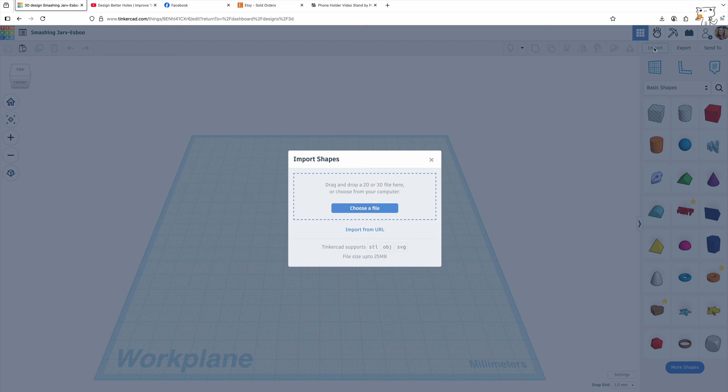Guys, today I'm going to show you how to import something into Tinkercad. Okay, you go to import, choose file, let's find something, let's say this cheer pom, click on art. I already have this size down to the size of a keychain, so when it imports, here it is.

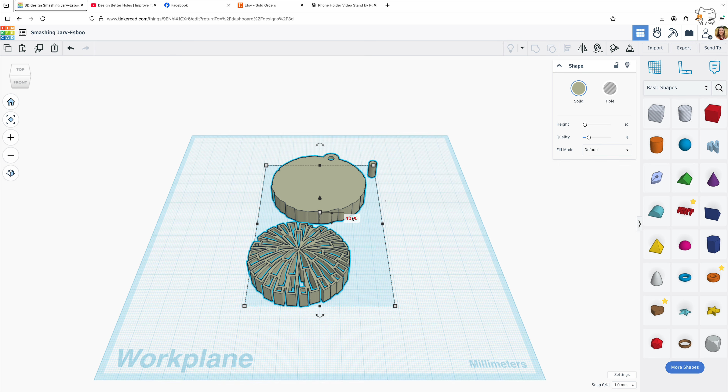So the first thing you want to do is click this middle, which shows you how tall something is. I'm going to reduce it down to 3 millimeters. Then I'm going to come up here, push duplicate, and move it over. Alright, so now you use this little square cube to move your things around. This is a block that creates a hole.

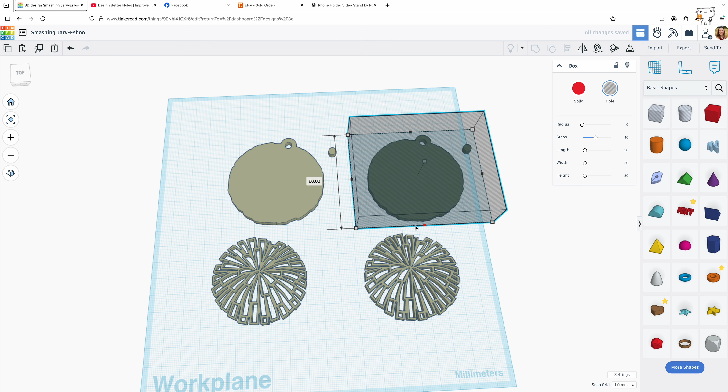So I'm going to go over what I need to cut out to separate these two things. So I want to keep this, so I'm going to get rid of this. Select, group. Red means it's doing what it needs to do. Okay, I want to get rid of this now. So select and group. And now this is the keychain hole.

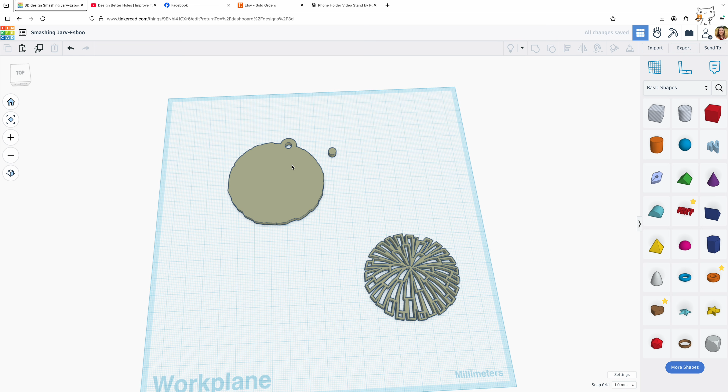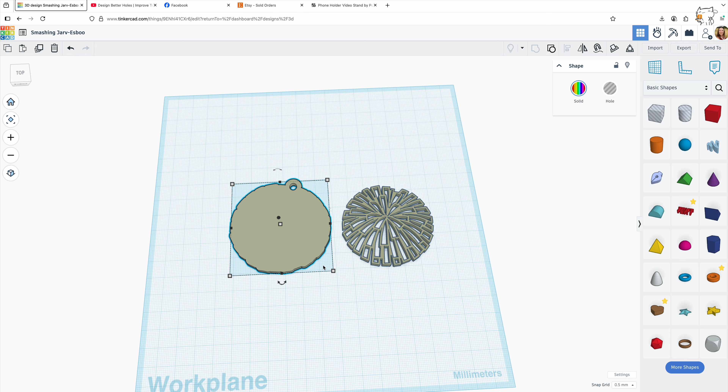I want to get rid of that also, so let's just put that on there, select and group. There we go. So now we have our two pieces. They're both at 3 millimeters high. So down here you can control your snap grid. So I want it to snap at 0.5 millimeters. What I'm going to do is I'm going to click on here and raise it up to 2.5.

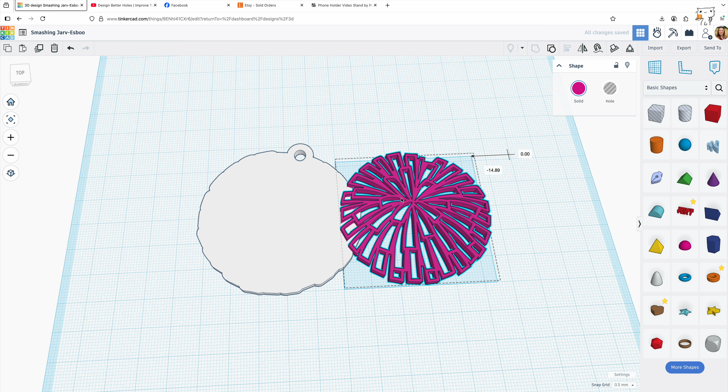Okay, so there we have that. I can change the color right here. I like to use the presets. Change the color of this. Alright, so then we have our two objects. We're going to center them by clicking these little dots to center them, and that doesn't work great because of the keychain hole. So I am going to drag this into place, and that looks pretty good to me.

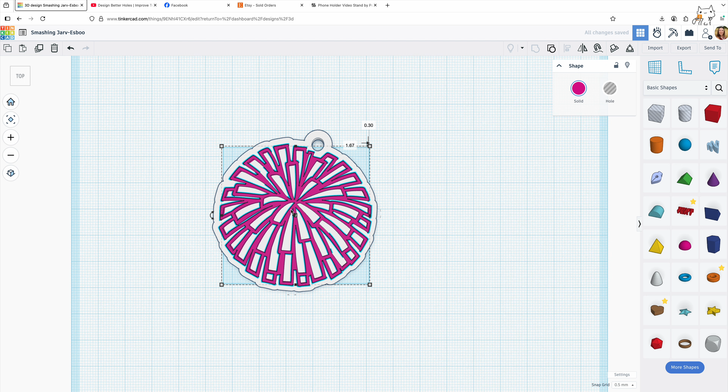Perfect. So now use the cube to show the side view. Okay, so this is 3 millimeters. And this is 3 millimeters, and that is why I brought this up 2.5 so that some of it is still in the white part. So we can go like this and push hole in there. Now it's see-through, you can see that some is down in the white part. Make it back to solid.

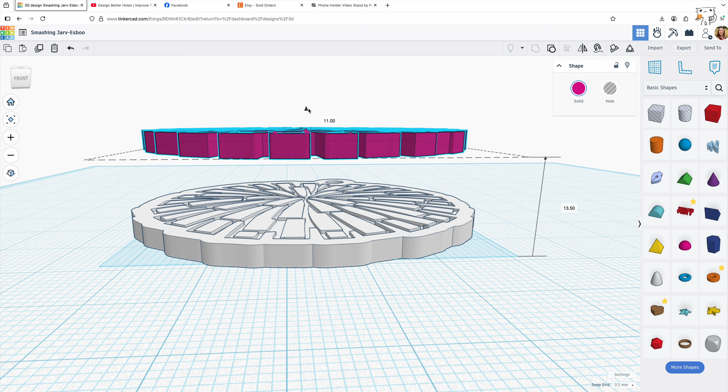What we need to do is we need to duplicate this, turn it into a hole, and then push shift and select the bottom layer. Then we're going to group it. So that's grouping the hole to the bottom layer and making a little cutout. So now we click somewhere to get it separate. Okay, this little arrow here raises things up. There we go. We have our cutout. I'll push Control Z to get it back to where it needs to be.

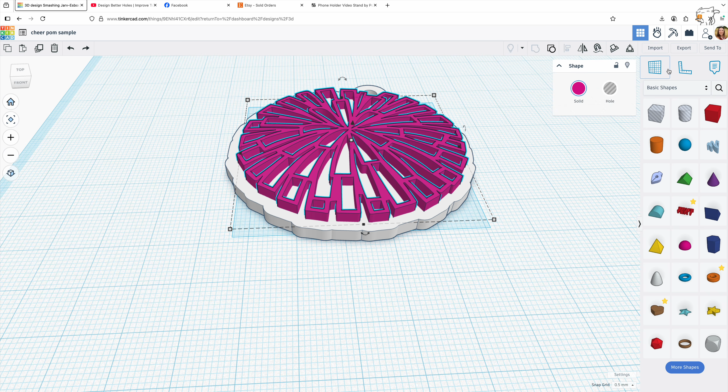And now I'm going to bring this into Bambu Studio. So you need to export these separately. So I click on the white. I change this funny name to something else like Cheer Pom Sample. Then I push export. You can see down here it's preparing model to export. It's done. Now I'm going to click the pink and do the same. I don't need to change the name because it's unique enough that I can see both names when I open it up. Okay, now I'm going to open Bambu Studio.

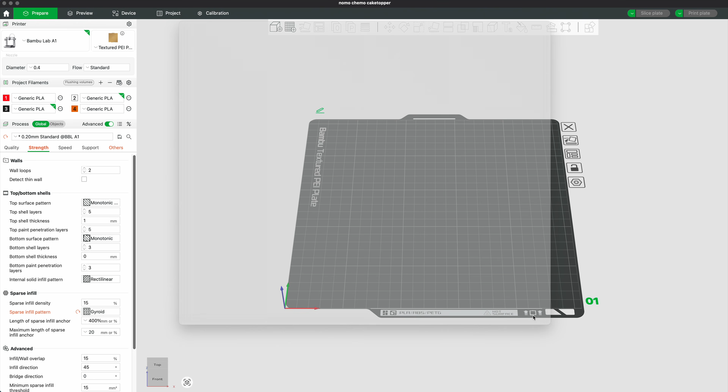Here it is. You're going to go up here to add. Okay, and then I'm going to find Cheer Pom Sample. I'm going to push shift and select both of them. I'm going to say yes. Load these with multiple parts. And here it is. Yay! So right now it's all one. What we need to do to make it two colors is come up here to split objects, click it.

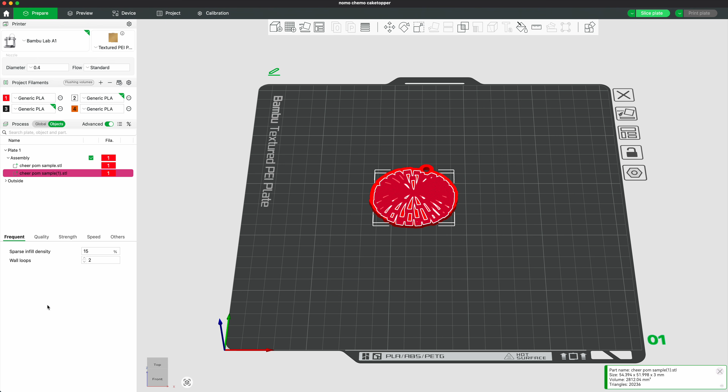And before doing anything else, go over here and switch from global to objects. And this is where your two layers are. So I'm going to right click and push merge. It took me a long time to figure that out. I find merging is way easier than this assembling. Okay, so now I can see which object is which. I'll say pom. I'm going to click this and type in pom, return, and then click here, say bottom.

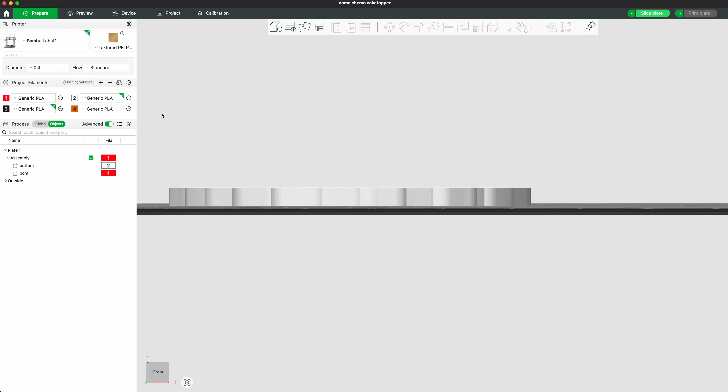I'll click this box to choose a different filament. White it is. All right, so now you can see that it's all in one layer. Like, it doesn't stick out at all. I want it to stick out. So I'm gonna click on pom, not double click, okay, click on pom.

Because it's merged, I can now move it. Click up here to these arrows to move. Grab this blue arrow and move it up, up and away. So you can keep moving, but we don't want to. We want to be down in there. Let's see. Down in there, right about there. Let go, and now we have our two layers.

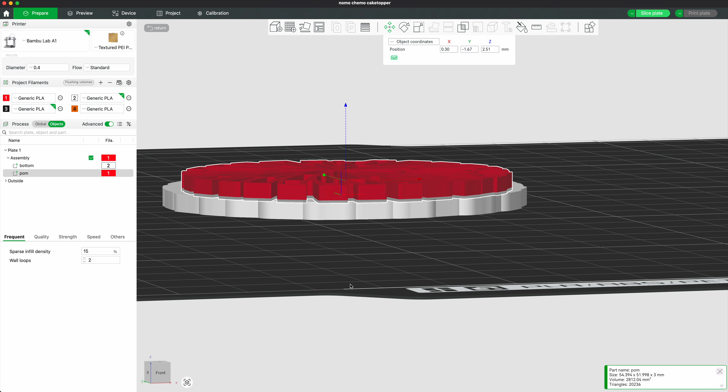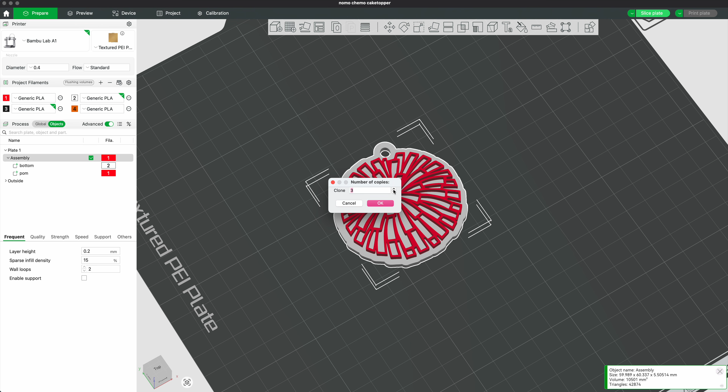So now all you have to do is export, save, and then you can, I guess, print it out. If you want to make more of these, then you would right click, and you could choose how many copies. If I just want one, there we go. Let's see if I delete this and see how well it does with fill bed with copies. Wow, there you go. Lots of copies of the same thing. So because of it being so full, you can only print by layer and not by object.

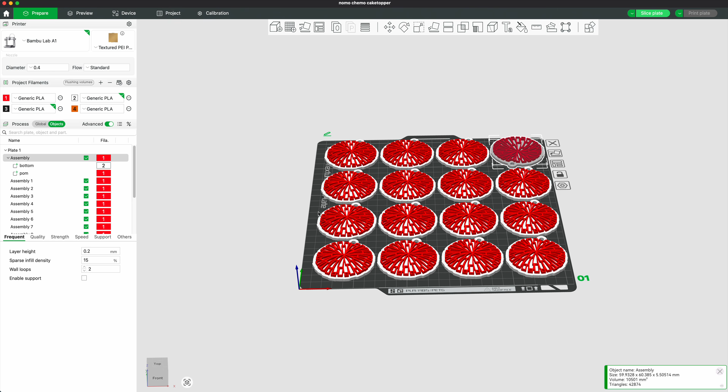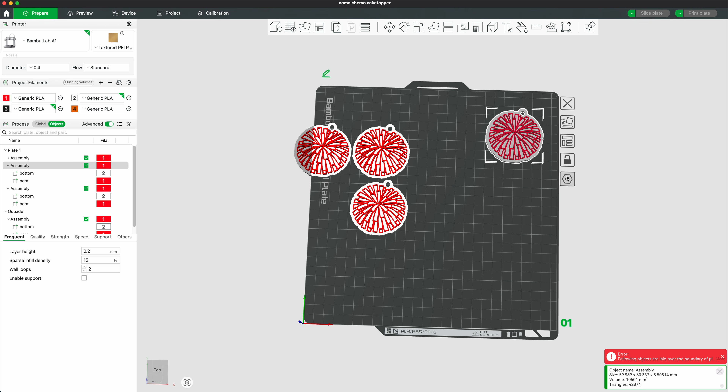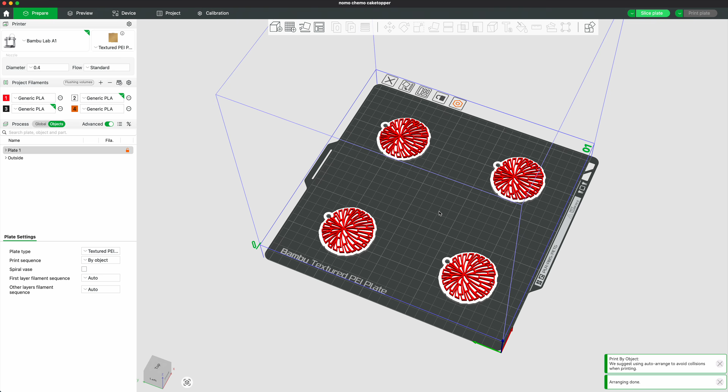So let's press Control Z, undo. So if I wanted to print by object, because I wanted different colors, I could clone, let's say 3 copies, and then I'll push over here to this gear and change my print sequence to by object. Then the best thing to do here is to push auto, and it will put it on the cutting mat in the perfect way for it to print.

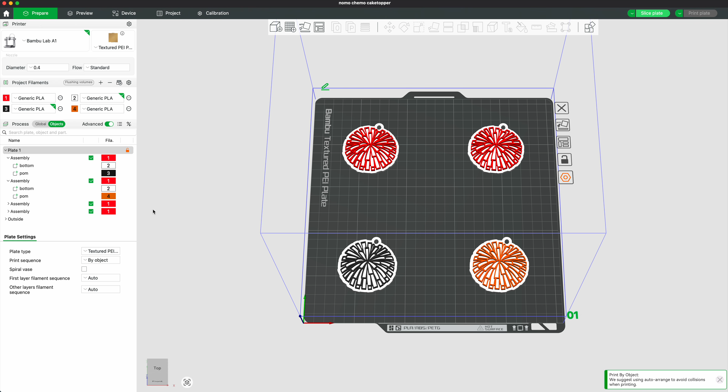Okay, so I could also change things over here. I can take one and change the pom color, let's say black. Okay, I can change another one just to show. There we go. So then I come up here to slice plate. It will go through and it will tell us all the details. Here we go. It says 3 hours for these 4. It says it'll cost around 94 cents.

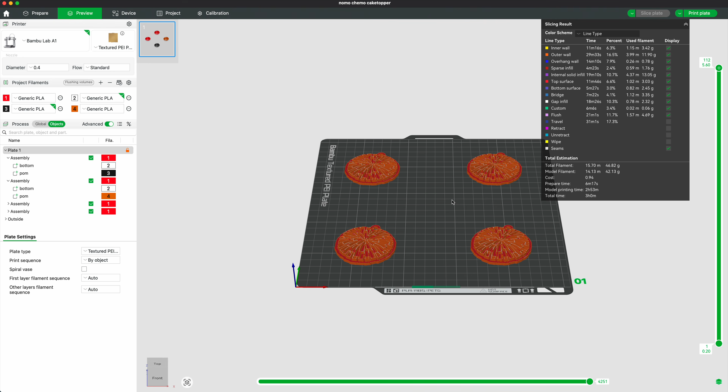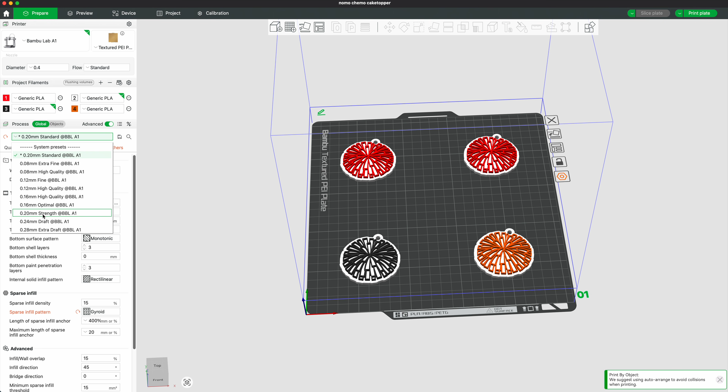And you go over to the sliding toolbar and go to the bottom, and you can see how it will print. Make sure everything looks good. Everything looks great. I'll go back to prepare at the top, and here we will change this setting. If you want it to print slower but higher quality, then you want to choose a smaller number. I think this prints great at 0.20 millimeters, so that's what I stick with for this kind of a design.

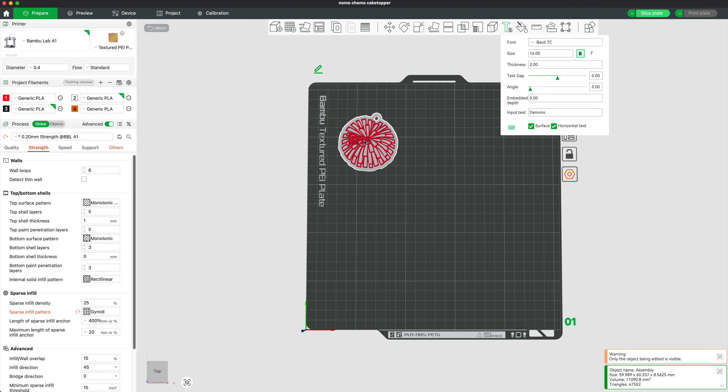You can also add some text on top of this. Let's see. You push text and then input text. Our local team is called Demons. Kind of ridiculous, but that's what it is. It won't let you choose just any text. It is kind of picky, so if you choose the text and it doesn't like it, then it's just not going to put it. But it's trying to be on top of these little things since it's not flat. Probably not the best idea with this design, but I can show you. Let's go back.

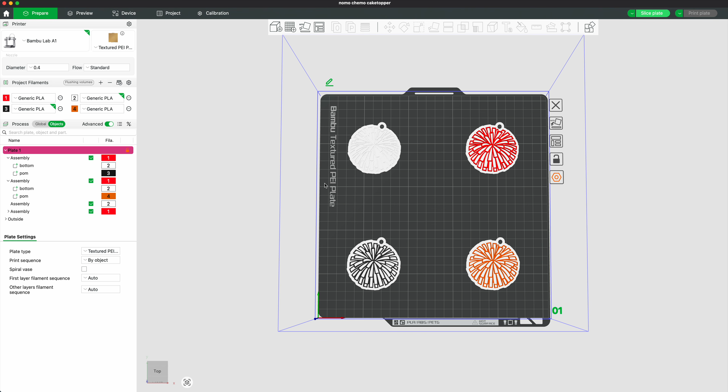Okay, let's take this design, go back to objects. Let's click on pom and let's delete the pom. No, that's not good either. That's not great. But just for an example, if this was a flat surface, we would just go to text and then type in our item. And then there it is. You would let go. You can change the size, everything there.

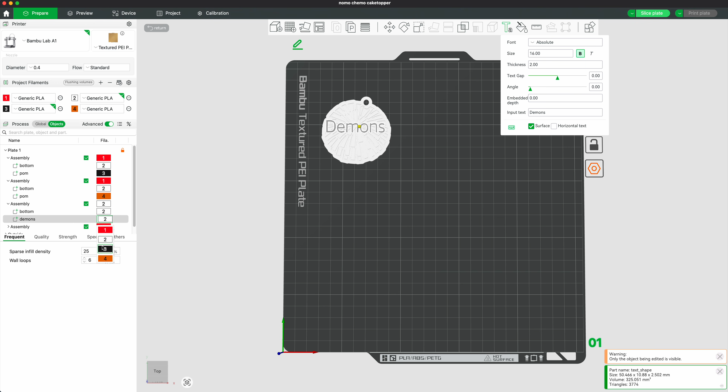You go over here, demons, and then you can click right here and change it to black so you can see it. Click over here and there you have it. So in order to move anything, they need to be assembled together and you need to click over here while in object mode. So now I could click right here and move these arrows around to move my words around. So that's what I have for you for now.

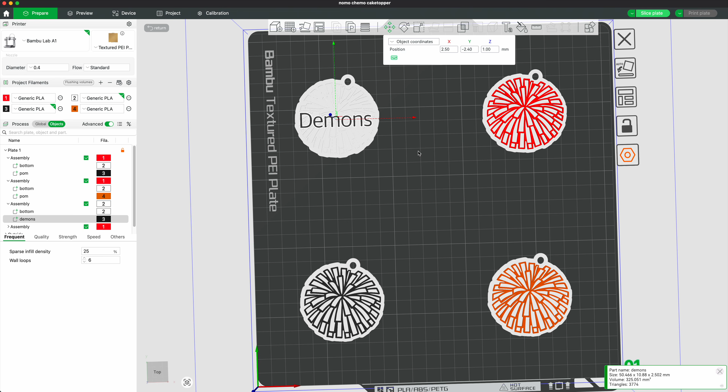I hope you like this tutorial. I'm not big on editing, so I'm not going to edit anything out. It's just what it is, with my printer going in the background and my AC.